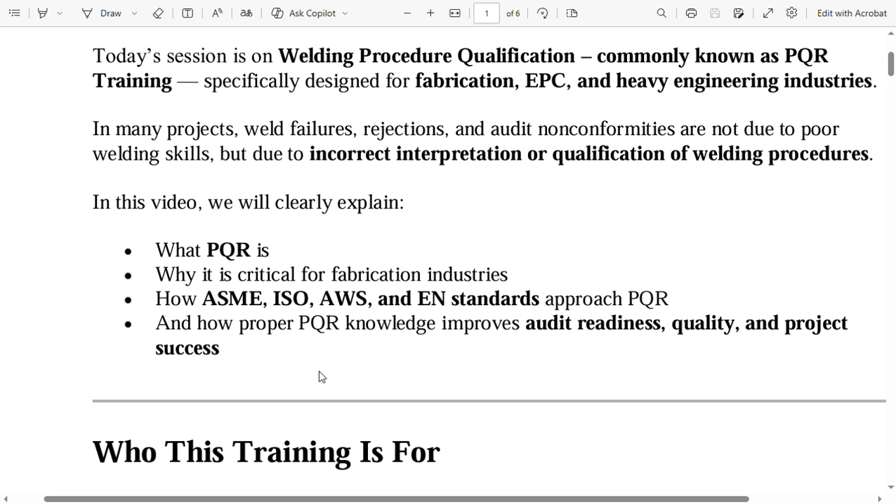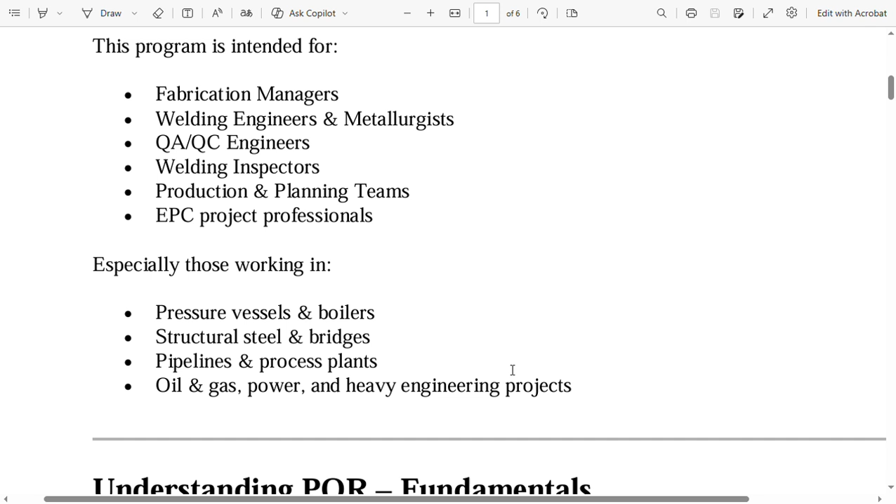Now, who is this training for? This program is intended for fabrication managers, welding engineers and metallurgists, QA/QC engineers, welding inspectors, production and planning teams, and EPC project professionals. They can join this online training program for PQR. Especially, this is meant for professionals working in pressure vessels and boilers, structural steel and bridges, pipelines and process plants, oil and gas, power, and heavy engineering projects.

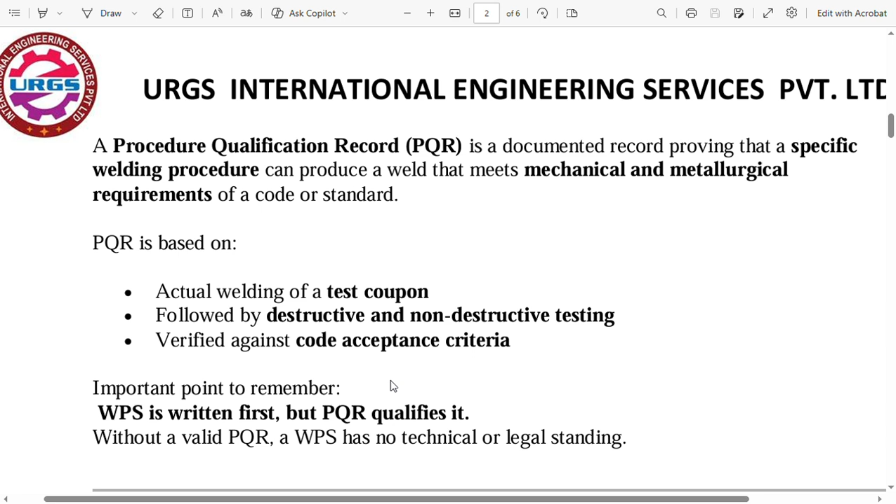Understanding PQR fundamentals. Let us first understand what a PQR is. A procedure qualification record (PQR) is a documented record proving that a specific welding procedure can produce a weld that meets mechanical and metallurgical requirements of a code or standard. PQR is based on actual welding of a test coupon, followed by destructive and non-destructive testing, verified against code acceptance criteria.

Important point to remember. This is very important. The PWPS, proposed WPS, is written first, but PQR qualifies it. Without a valid PQR, the WPS has no technical or legal standing. So these things are to be noted.

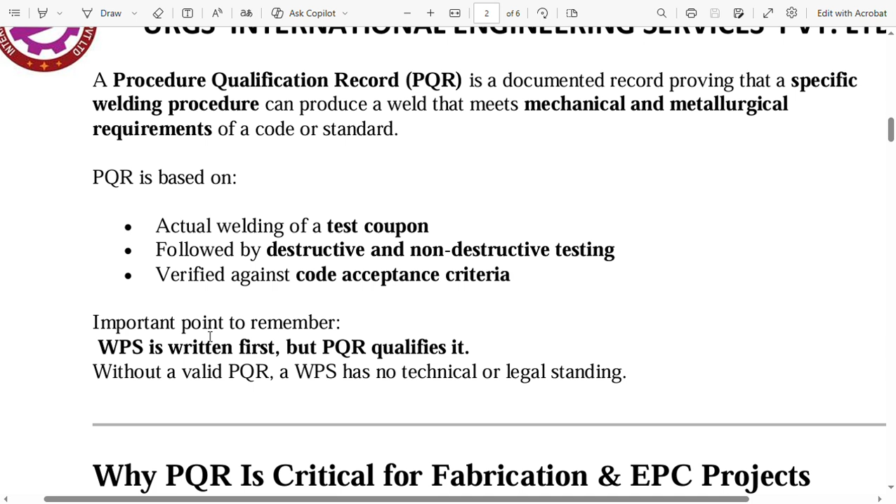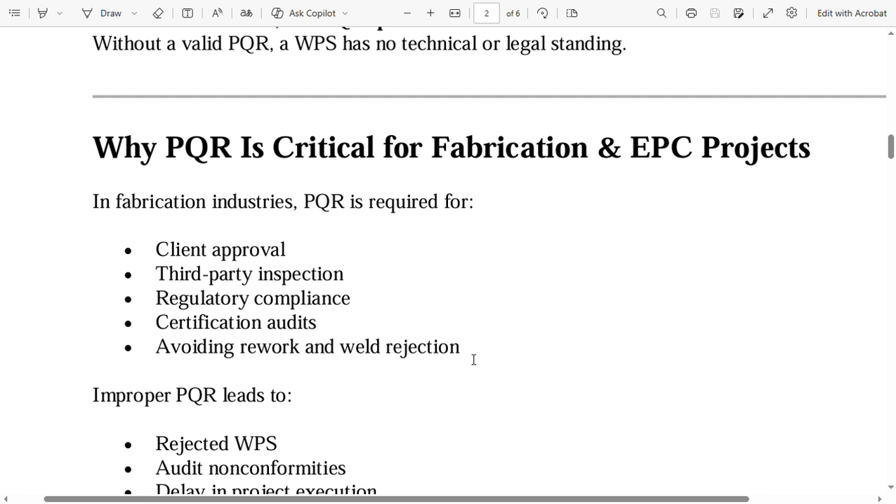Why is PQR critical for fabrication and EPC projects? In fabrication industries, PQR is required for client approval, third-party inspection, regulatory compliance, certification audits, and avoiding rework and weld rejection. Improper PQR leads to rejected WPS, audit non-conformities, delay in project execution, increased cost and loss of reputation. Correct PQR knowledge ensures compliance, confidence during audits, and consistent weld quality.

Now we will see codes. First, the ASME Section IX PQR overview. ASME Section IX is widely used in pressure vessels, boilers, and piping systems. Key focus areas in ASME Section IX include essential variables, supplementary essential variables, and non-essential variables.

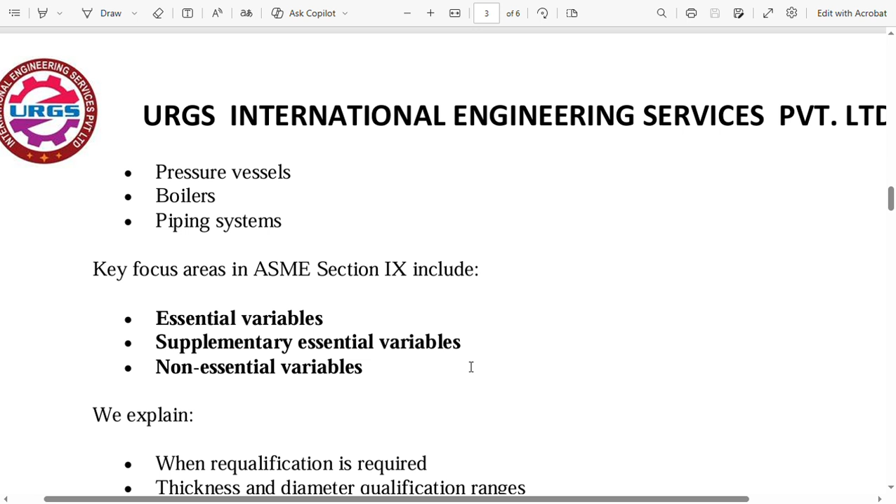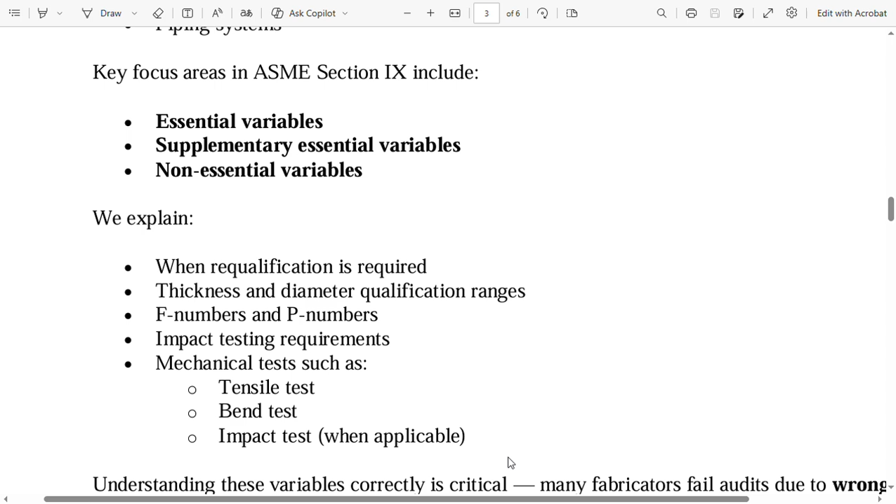We explain when requalification is required, thickness and diameter qualification ranges, F numbers and P numbers, impact testing requirements, and mechanical tests such as tensile test, bend test, and impact test when applicable. Understanding these variables correctly is critical. Many fabricators fail audits due to wrong interpretation of qualification ranges.

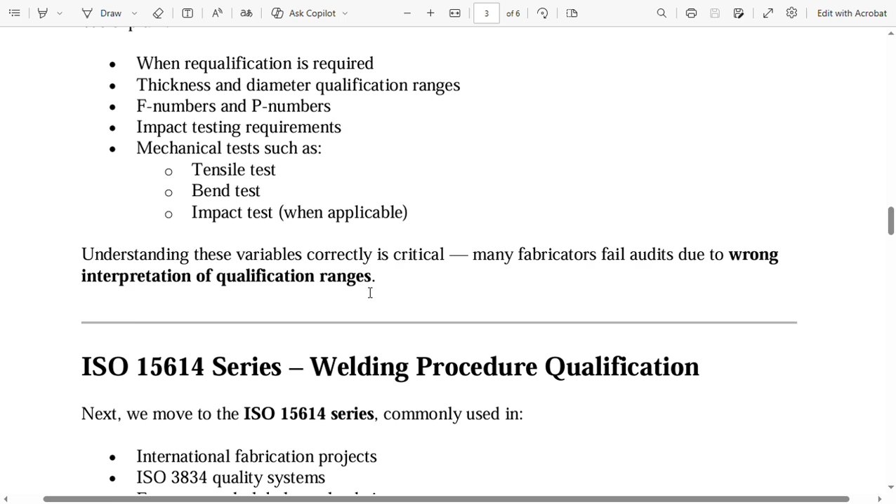The next standard is the ISO 15614 series, Welding Procedure Qualification, commonly used in international fabrication projects, ISO 3834 quality systems, European and global supply chains. ISO 15614 focuses on material groupings as per ISO/TR 15608, thickness and diameter qualification rules, joint configurations and welding positions, and testing scope based on application.

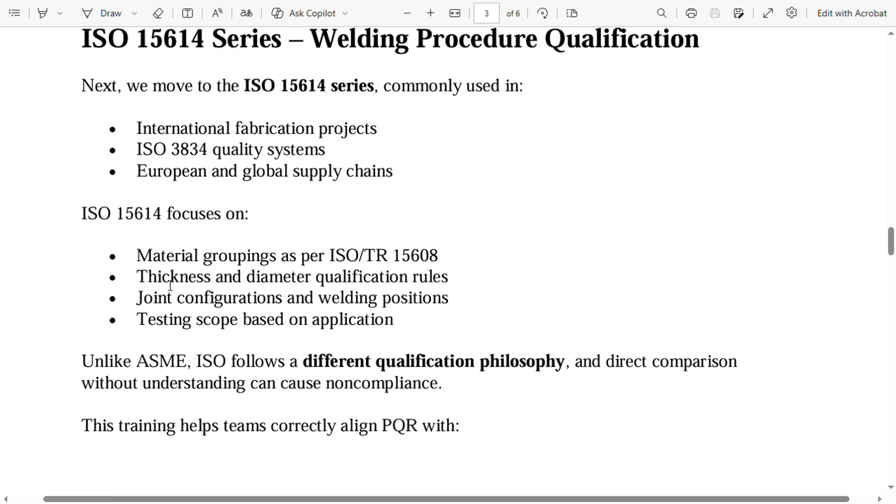Unlike ASME, ISO follows a different qualification philosophy, and direct comparison without understanding can cause non-compliance. This training helps teams correctly align PQR with ISO 15614, ISO 3834 requirements, and client and notified body expectations.

Now, AWS D1.1 Structural Welding Code Steel, used extensively in structural steel fabrication, buildings, and industrial structures. AWS D1.1 introduces an important concept: pre-qualified WPS versus qualified WPS. Keep this in mind.

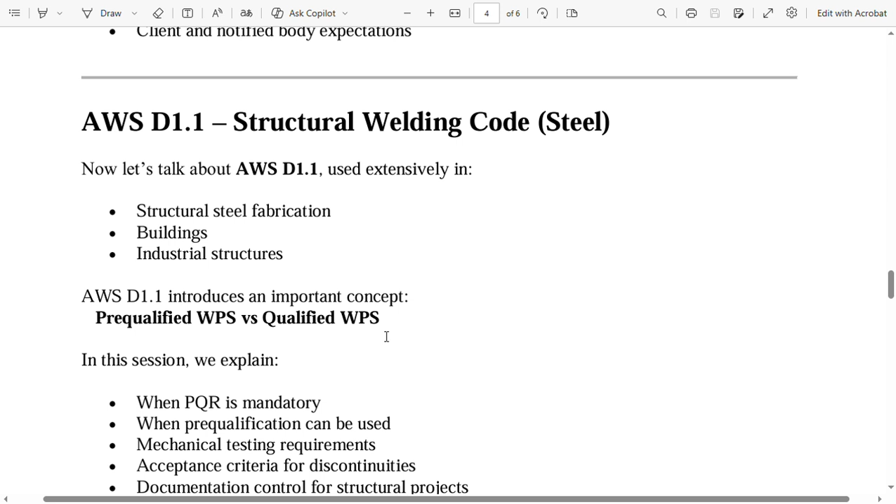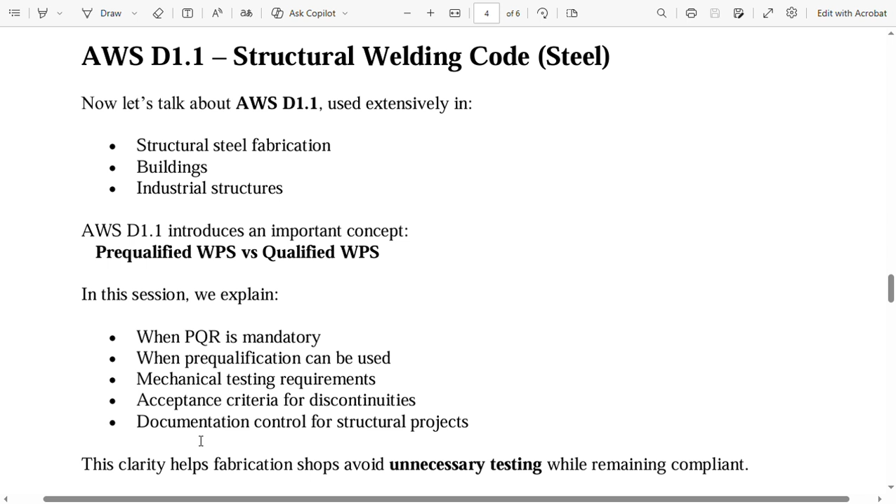In this session we explain when PQR is mandatory, when pre-qualification can be used, mechanical testing requirements, acceptance criteria for discontinuities, and documentation control for structural projects. This clarity helps fabrication shops avoid unnecessary testing while remaining compliant.

Next is AWS D1.5 Bridge Welding Code. For bridge fabrication, AWS D1.5 applies, with key emphasis areas: fracture critical members, qualification restrictions, enhanced testing requirements, and strict documentation control. Bridge projects demand zero tolerance for errors, and PQR compliance plays a major role in approval by authorities.

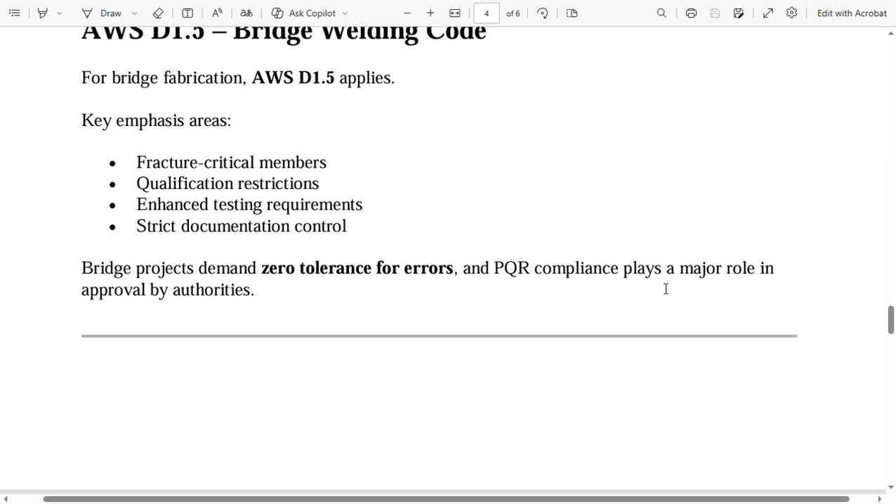EN welding standards, EN ISO series. For European and export projects, EN ISO welding standards apply. This segment covers the EN ISO qualification approach, testing scope and material grouping, relationship with CE marking, and documentation expectations for notified bodies. Understanding EN standards helps fabricators access European markets without requalification issues.

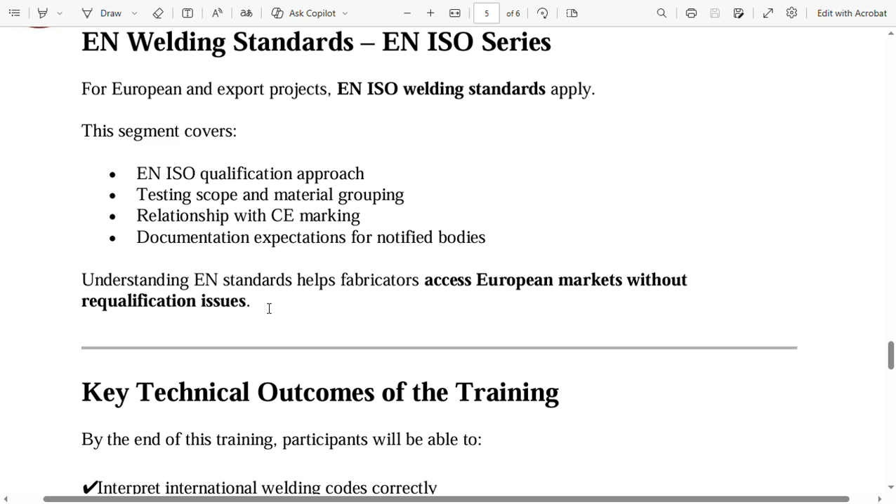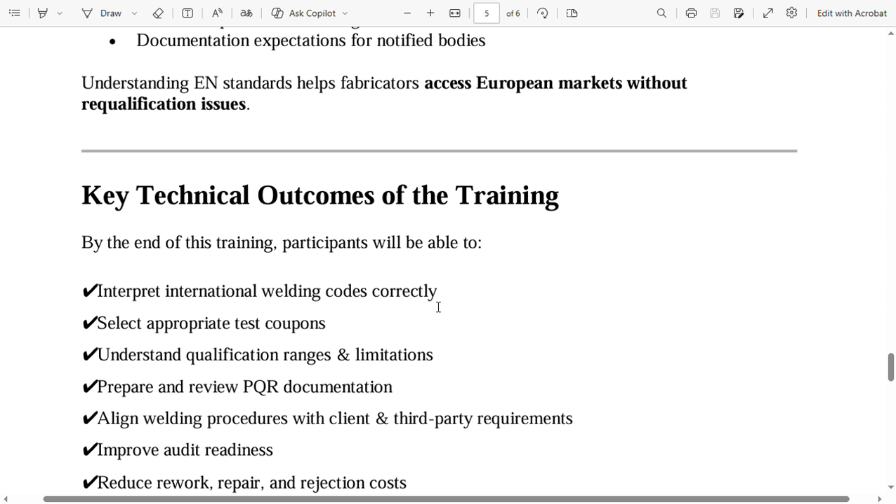Key technical outcomes of the training. By the end of this training, participants will be able to interpret international welding codes correctly, select appropriate test coupons, understand qualification ranges and limitations, prepare and review PQR documentation, align welding procedures with client and third-party requirements, improve audit readiness, and reduce rework, repair and rejection costs.

Training delivery and duration. Our online PQR training programs are structured as: ASME Section IX, 2 days online, 12 to 14 hours. ISO 15614 series, also 2 days, online and on site, 12 to 14 hours. AWS D1.1, 2 days, 12 to 14 hours. AWS D1.5, 1 day, 6 to 7 hours. EN ISO standards, 1 day, 6 to 7 hours. Live online sessions with real project examples, practical explanations, and question and answer discussions.